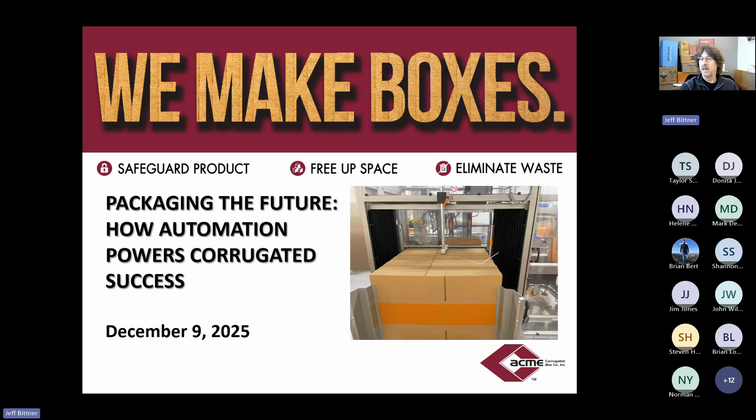So our webinar today is Packaging the Future: How Automation Powers Corrugated Success. With that, we'll move into some of the information.

Why has automation become so prevalent? Various factors have contributed to that, including increasing labor costs and the difficulty that so many companies have in securing enough production employees to run their operation. There's also a demand for higher quality and consistency of outputs—what does the product look like when it leaves the manufacturing company on its way to the next users? Also, lower production waste and related costs can be impacted by use of automation, having the cycle be the same time and time again. And on top of all of that, critically important, is safety considerations for the organization and the employees who run the production equipment and handle the product.

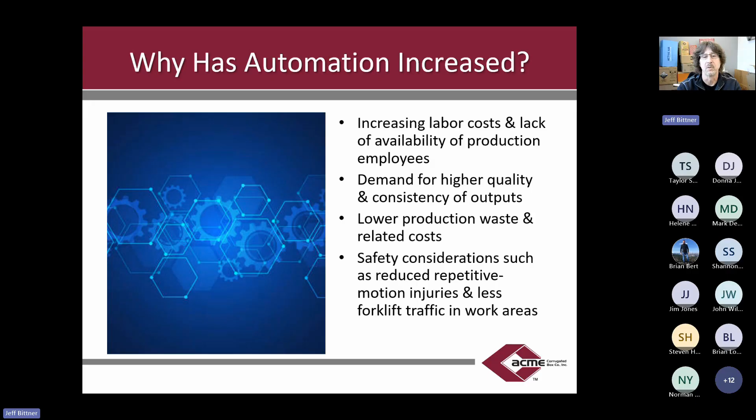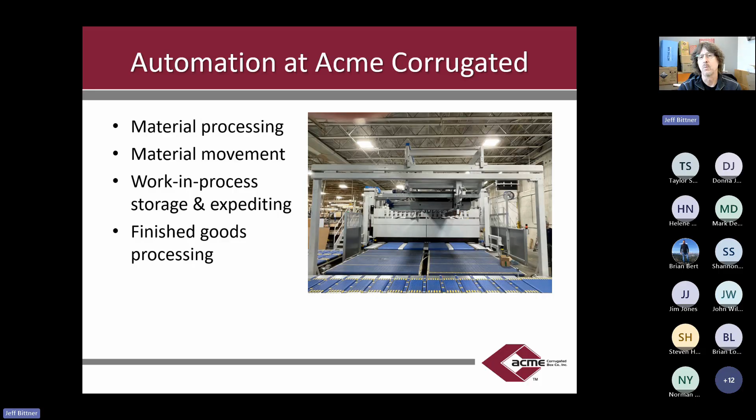I'm going to begin with an overview of what we've done here at Acme Corrugated over the years I've been with the company. Most of this has really happened within the last 5 to 10 years, and the last 5 years have been particularly active. The things we've really focused on to support the operation include material processing, material movement through the facility, how we handle work in process and move it around and store it while waiting for next steps, and then what we do with finished goods as we prep them to go out the door. So I'm going to show you some videos I took from around the facility, and some from our customers, to illustrate these processes.

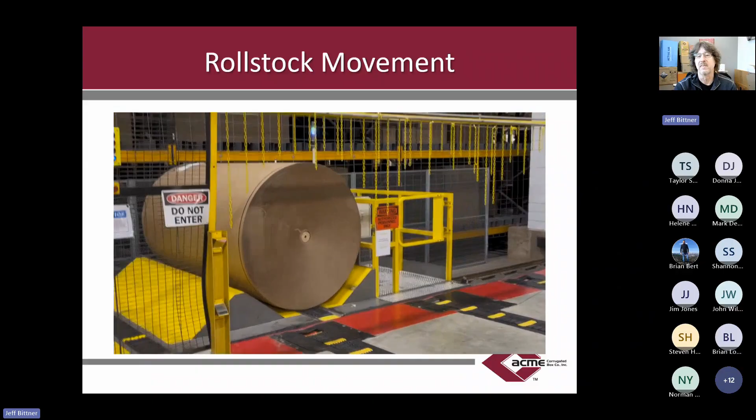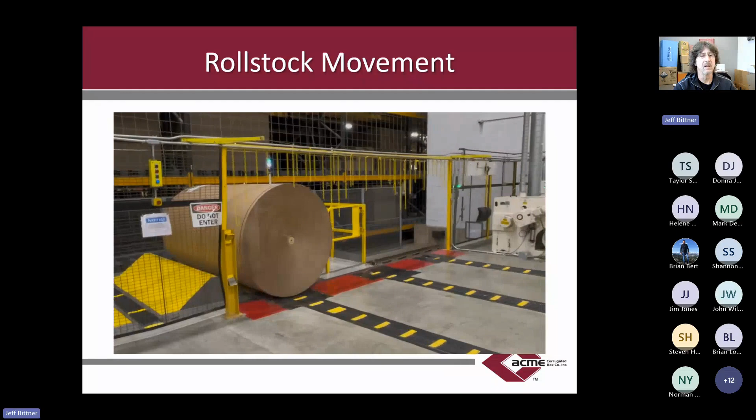This video shows roll stock movement—rolls of paper that we routinely use and move from our warehouse into points of use. A roll like this typically weighs between 6,000 and 8,000 pounds. In the past, a large clamp truck, pretty much like an oversized forklift, would bring rolls to the work areas, competing with space for production employees and other materials. This traffic has been fully eliminated by automating this, where a trolley brings the rolls to the point of use. Employees in the work area are controlling movement of the rolls, so safety has been improved significantly as well.

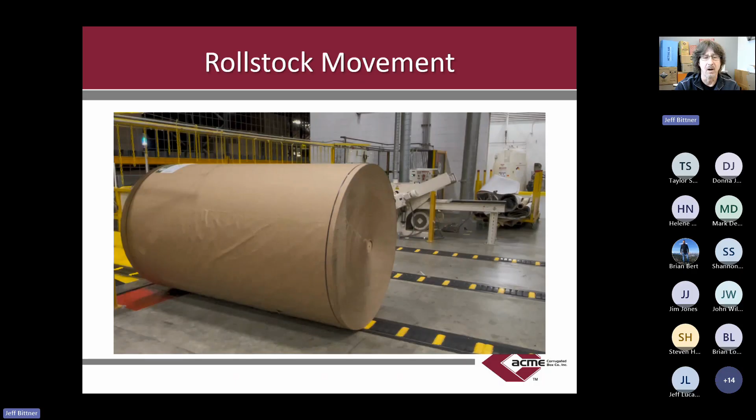When those sheets are manufactured, they have to be moved from the corrugator area that makes the fluted sheets into areas where they can be converted into boxes. In the past, stacks of sheets were placed all over the building where floor space was available, but in 2021 into 2022, we installed this high rack storage system where robotic cranes move product in and out of the storage area, waiting for next production steps and securing the product in a safe location rather than having forklifts move around and around.

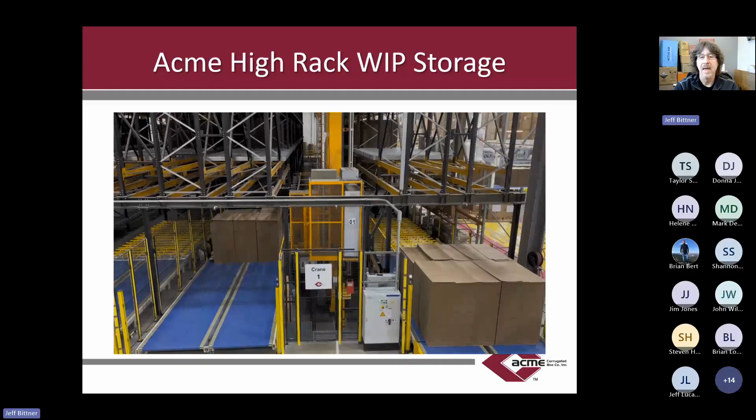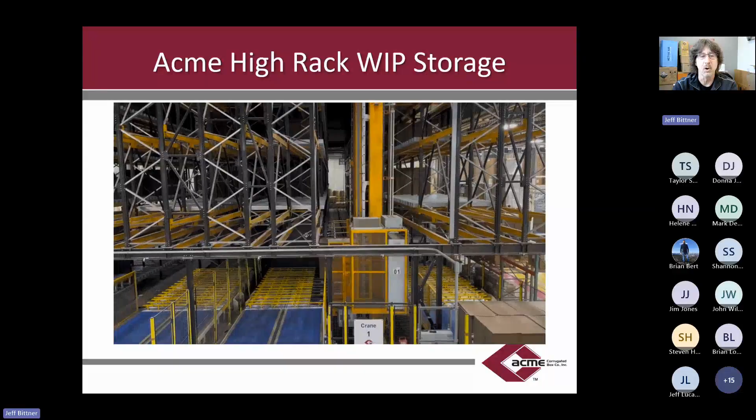This multi-tier rack storage system and a series of conveyors allows us to safely and efficiently move these sheets around. The video shows stacks of sheets being taken in and out of this storage rack until they're ready for production. The crane moves product in and out, safely handling this—there are no forklifts picking up stacks of sheets. You can also see, by the arrangement of sheets on these conveyors, it would take multiple forklift trips to move this product around. The scheduling team and supervisors can override what is automatically happening if there's a need to change production sequence due to business needs.

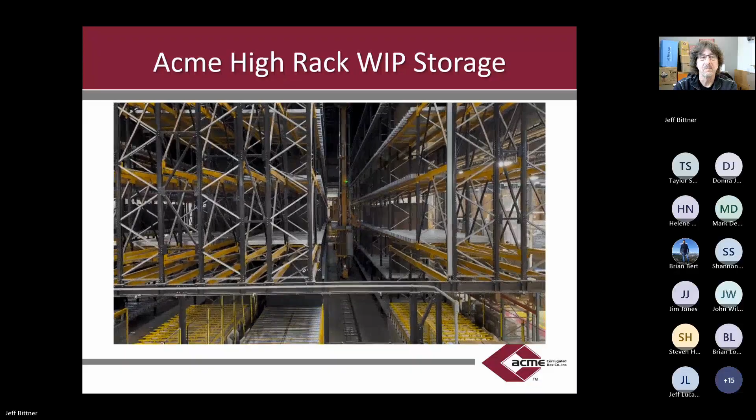Once those sheets are removed from the storage rack, a series of trolleys will take them to the appropriate converting line. The trolley orients itself to the in-feed conveyor at the production line, and the sheets are transferred into the production area, completely without forklifts driving back and forth in a traffic lane, competing for space with employees moving around.

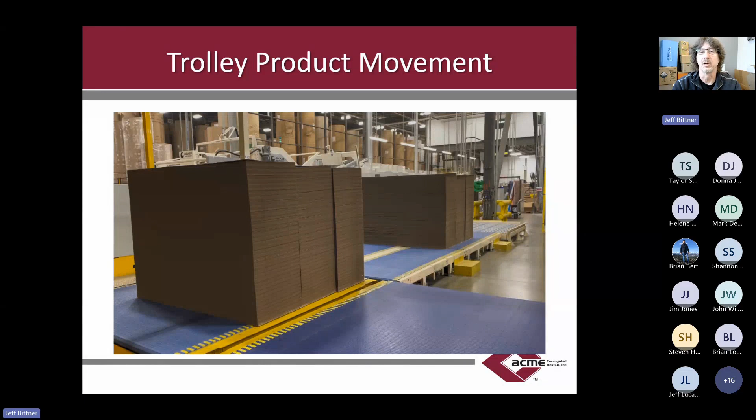Certainly, there are safety considerations with all of this automated equipment moving around, and people are trained to respond to that accordingly.

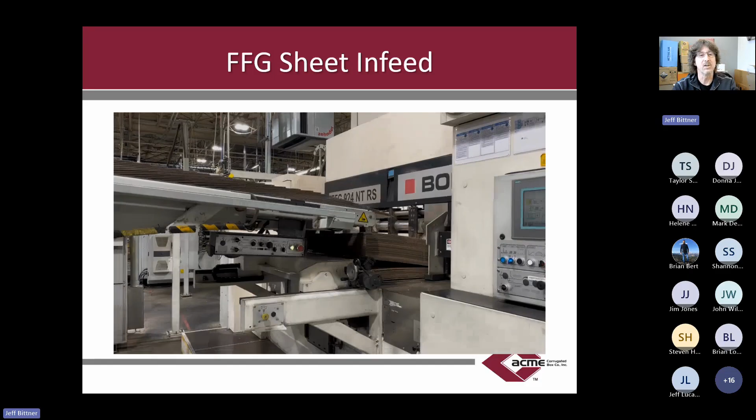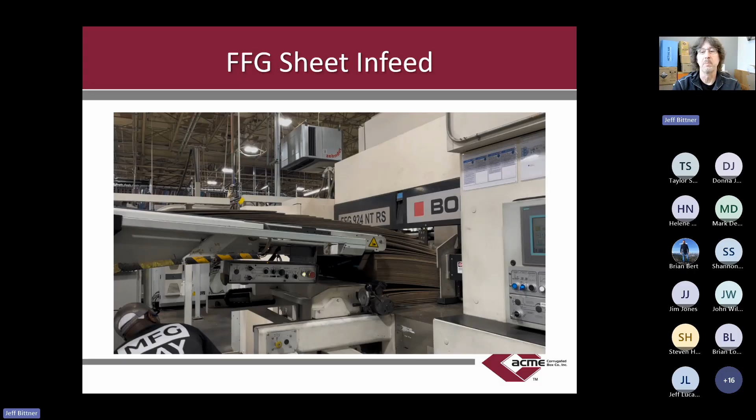Once those sheets are staged to go into the production line, in this case a flexo folder gluer, the stacks are knocked down into shingle form and sent directly into the infeed of the machine. This used to be one or two people manually lifting those stacks, heavy as they might be, into the infeed hopper hour after hour. Imagine doing this repeatedly throughout a full production day.

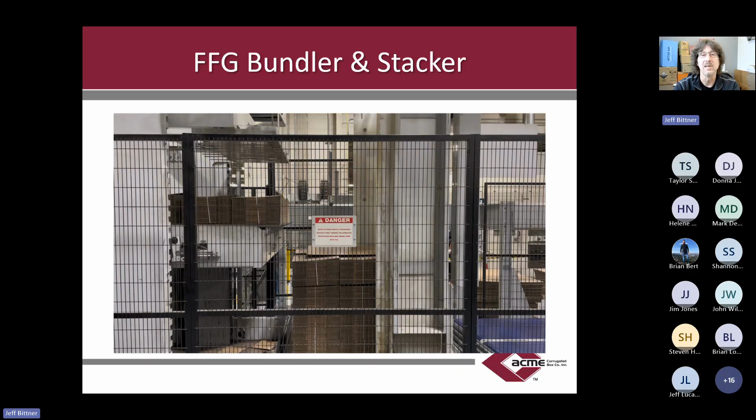Once boxes have been made, they must be bundled in uniform quantities and stacked to be prepared for shipping. In the past, employees were staged at this area to lift boxes bundle by bundle and build a finished unit based on the stacking plan.

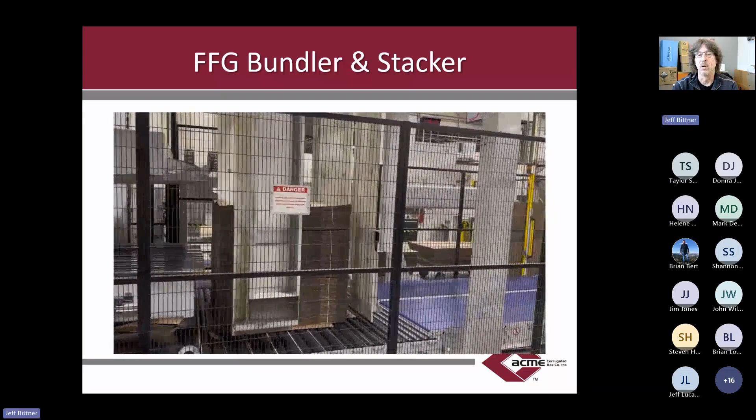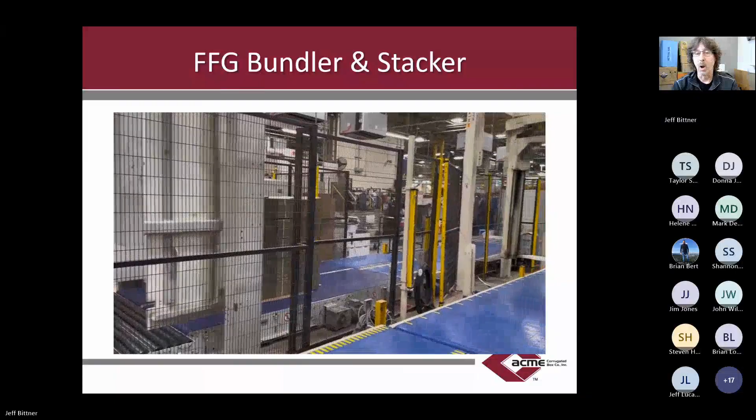The automated stacker creates a layer of boxes at a time, all together, and then builds a full unit to the defined height. Once the system has been taught the layout, it can be recalled if this same box is run again, and the system already has the configuration program. So it basically learns each time the job is run.

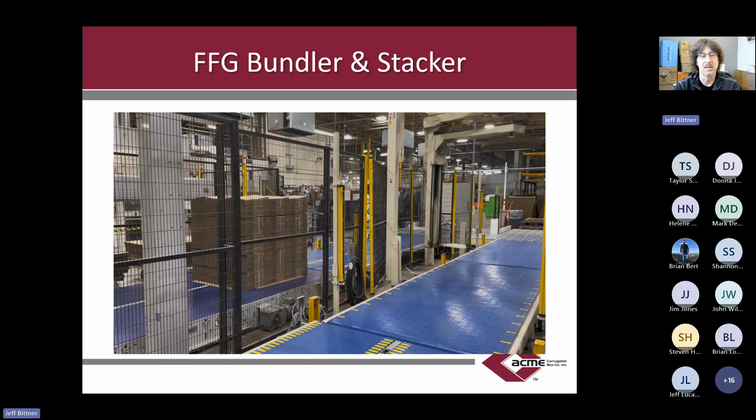So that's what we've been able to accomplish at Acme in recent years. It's certainly quite impressive, and every time I witness what's going on down there, it continues to impress me.

Now I'm going to turn attention to what our customers are doing with their automation, and really the impacts that it's had on what we do here at Acme.

Key things: boxes certainly must meet higher quality standards. In some cases, depending on the nature of the automated equipment, we will have to actually redesign the box so that it works mechanically well in those processes. So the more we know about that, the better we can be prepared for what the customer's needs may be.

It's not a one size fits all or one style fits all. Different types of automation can have very different requirements. In the videos I'm about to show you, you'll be able to see the variety, both in terms of mechanical layout and sophistication of system, that can make a huge difference in what the boxes are going to be like.

So the types of equipment being used, I've broken that down into four different types of machines: a basic case erector, an enhanced case erector, a tray machine, and an integrated packing line. I'm going to show examples of each so there's a better understanding of what this type of equipment is all about.

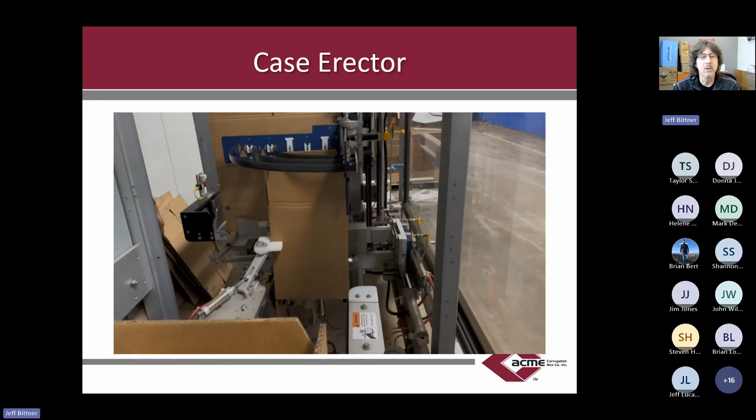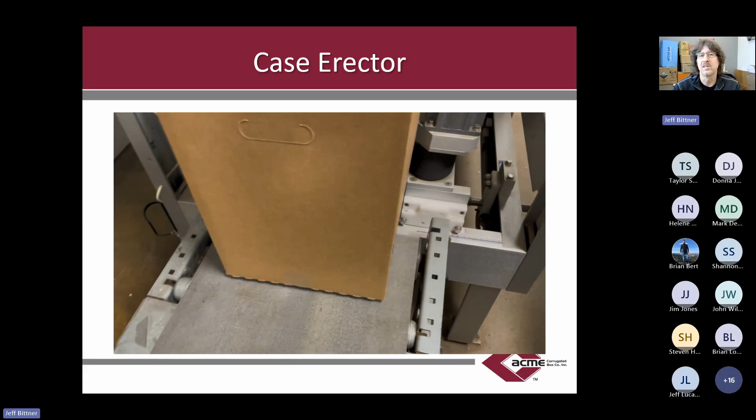We'll begin with a basic case erector. The responsibility of this machine is to pull a flat box from a hopper, open it up, configure it, and then send it across, in this case, a tape head to seal the bottom of the box. Some of these machines can use hot glue instead of tape, but each method is typically effective depending on the end use for the box.

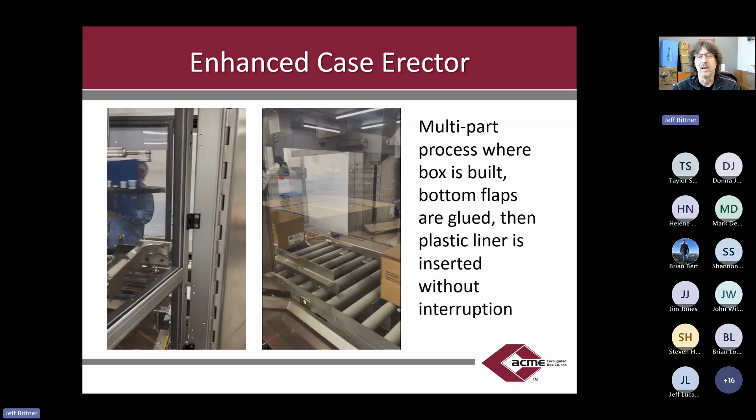Now we're moving on to an enhanced case erector. In the first video, we see a different style of doing about the same thing as the previous video showed: the box is pulled from a hopper, it's opened up, the bottom flaps are folded, and it's sent across a sealing line. In this case, the bottom of the box is hot glued together.

However, in the next step, just a few feet down the line, a plastic bag is automatically inserted into the box. The bag is dispensed, blown open with air, and then sent forward. In this case, the box is ready to be packed with meat products, slices of meat that are going to be used for steak sandwiches.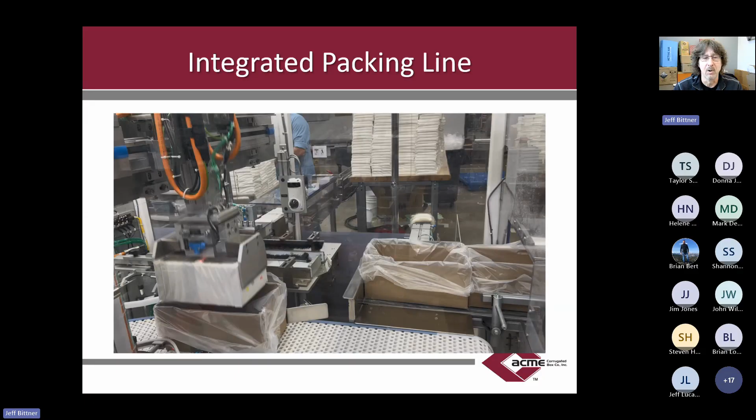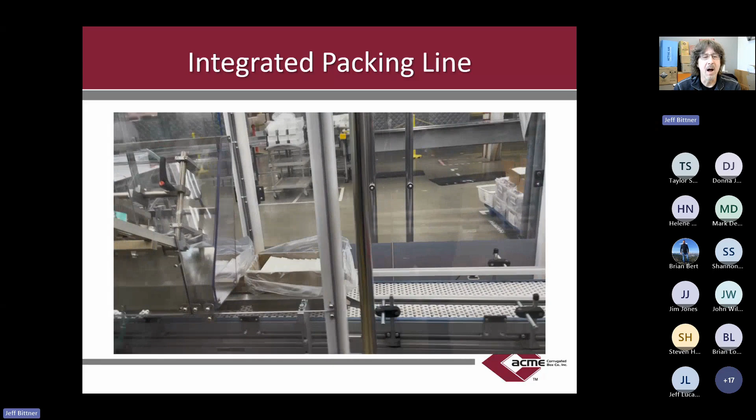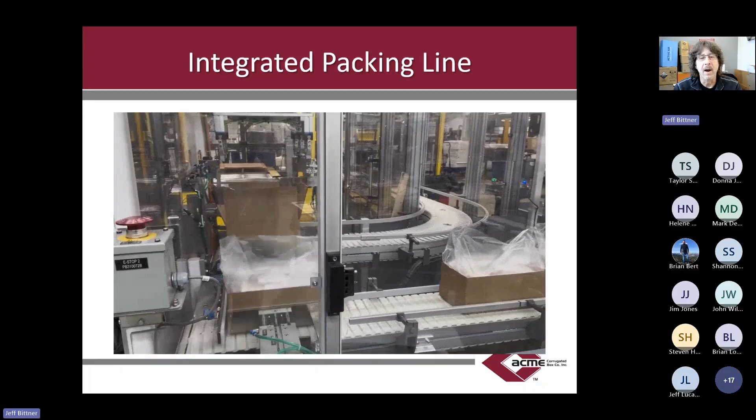So here we're seeing phase one of this process. These white bricks are wrapped kits that the customer makes. The inner box is bagged, and then a dozen of these bricks are inserted into the bag. From there, it moves forward into the next step where these boxes have an insert placed on top, and then the bags are semi-closed as they're moved forward to the next step, where a pair of the boxes are gathered together, gripped, lifted, and inserted into the shipping carton.

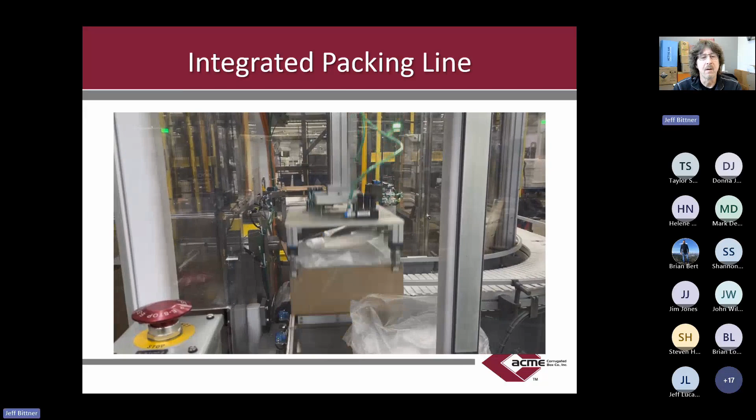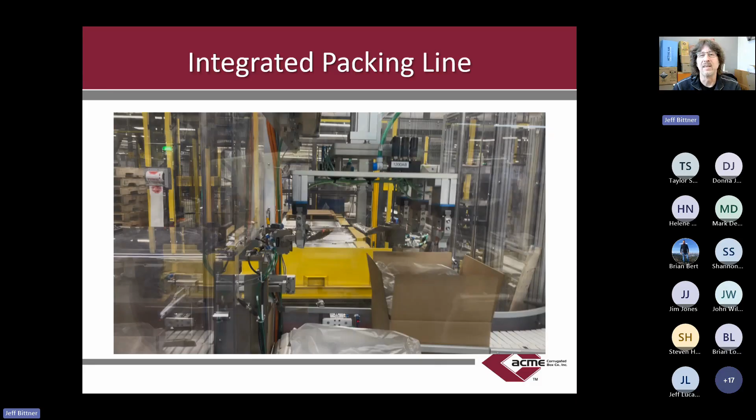What becomes particularly important here, especially since Acme makes all of the corrugated parts, is that they have to fit together seamlessly, because if something is out of square or too big, the parts are not going to all fit together. So we had to spend a bit of time making sure that everything was designed and engineered correctly to have this line work properly. We certainly never want the boxes involved to be a reason why the line completely goes down. If any part of the line shuts down, it typically will suspend the entire process, regardless of which element it is.

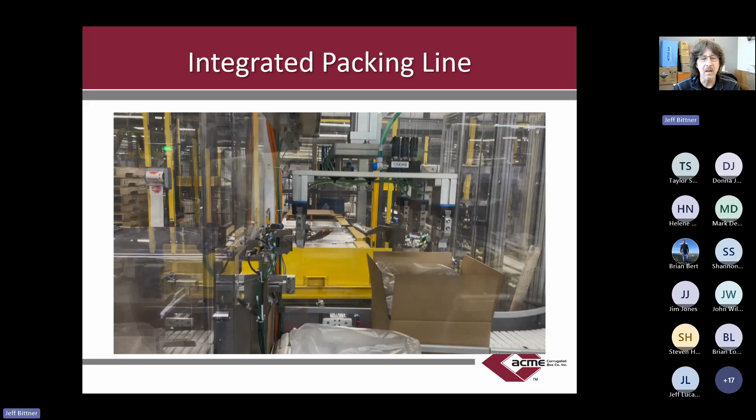So with that, we've had the overview of all the types of automation, both at Acme and with customers that I've visited. So what is going to happen in the future? Certainly the past few years have been very active with how this has grown, developed, and broadened in types of application. It will certainly continue, probably at an even greater pace going into the future.

Most of what I've shown you today has occurred in the last few years as companies continue to struggle with hiring enough employees or the right type of people to work in production. Automation can be an effective way to offset those challenges. Certainly safety considerations are a big part, and automation can be a tremendous asset in simplifying that as well.

It's hard to have a day go by where artificial intelligence does not come up in some form or another. That will certainly have a notable and positive impact on what's happening with automation, as AI can be used to help design systems, to lay out production paths and such, to optimize what we really want to happen with an automated process.

But all of this really demands consistency of inputs, whether it's boxes or other parts going into a line, because automation prefers that things be the same day after day, time and time again, so that any outliers from that normalcy can be eliminated. It's typically exceptions to what's going on that will have the greatest impact on compromising a line.

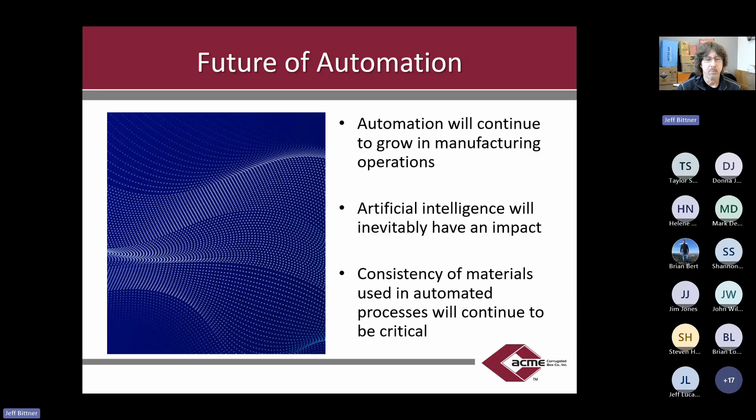That pretty much brings us to the end of the examples I've been able to prepare for this presentation. But before we move on to questions, we're able to preview the hot topic for many companies and what we're going to have for our first webinar in 2026. Sustainability, just like AI, it's hard to have a day go by where some element of sustainability doesn't come up in conversation. In fact, here at Acme, there has been no greater subject for inquiries from our customers than sustainability, and there's no close second. So next year, we'll be able to share what Acme has done to date with sustainability matters and where we expect to head in the future. So something for everybody to look forward to in the new year where that subject is appealing.